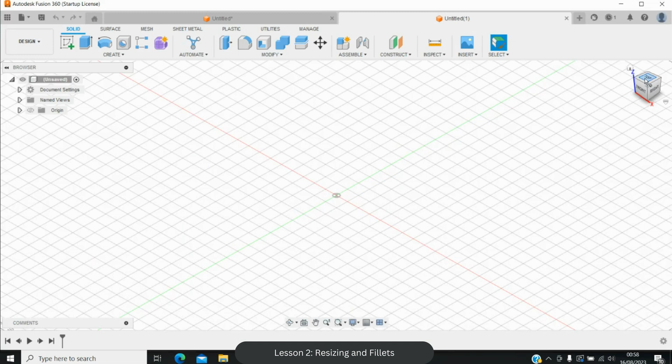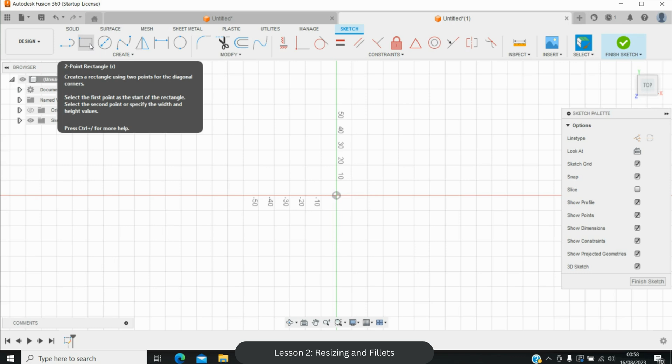So let's click top to get a bird's eye view. Let's create sketch and let's click this button. Now, because we're looking at resizing, I am going to make a shape that is bigger than what I want. I tend to work when I'm making my cutters at about a 10 centimetre largest dimension shape, just because that does make for easy maths further down the line. There are other ways to do it that we'll do in more advanced lessons. But for now, let's make a 10 by 10 centimetre square.

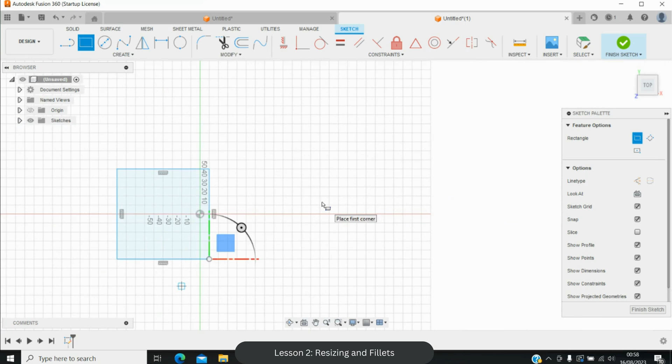So if you want to pop that in, so 10 centimetres at the top, 10 centimetres at the bottom. Perfect. So I'm going to pan that over because I want that to the side, and I'm going to zoom out. I'm going to hit the escape key. Okay, so we've got our basic shape. We are going to want to make 4 sizes of this today.

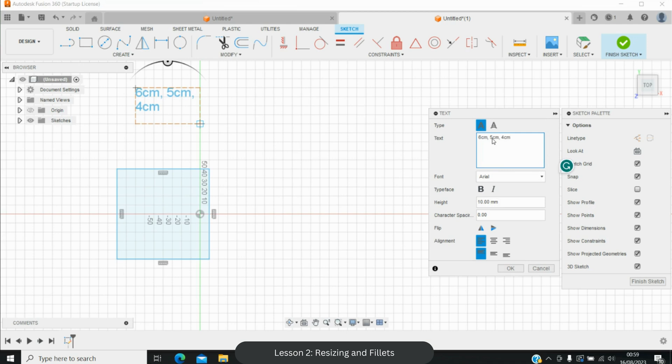So I'm going to click create and I'm going to put a text box. You don't need to do this, it's just for a little note what shapes we're agreeing. So we're saying we're going to make a 6 centimetre shape, a 5 centimetre shape, a 4 centimetre shape, and a 2 centimetre shape, just so I can remember easily what size I'm making.

Now, we can certainly go, especially with a shape this simple, and make 6 centimetre shapes, 5 centimetre shapes, 4 centimetre shapes, 2 centimetre shapes with little to no effort. However, this resizing that I'll be showing you is going to be very helpful on more intricate designs or ones that aren't pre-built shapes in Fusion 360.

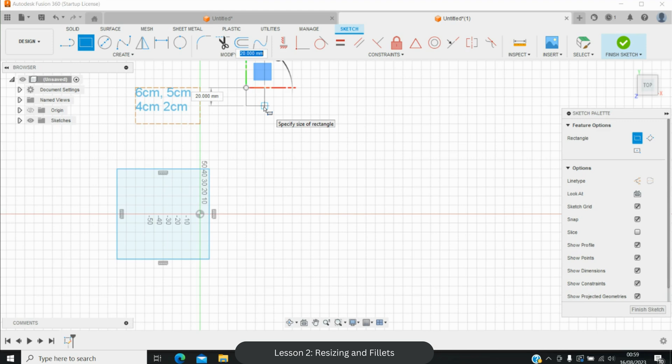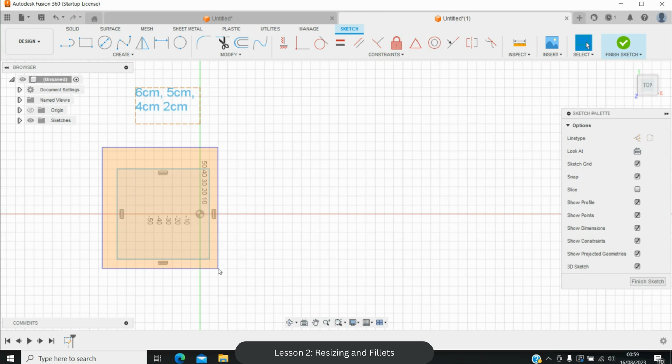So we're going to use a select option here. It is a window select that we will be using for this lesson today. There will be times in future lessons we'll be using the freeform, but you can see the window selection has a keyboard shortcut of 1. So select 1 on my keyboard, click and drag and highlight it all, let go of my mouse, and this shape is highlighted. Perfect. I'm going to right click on it.

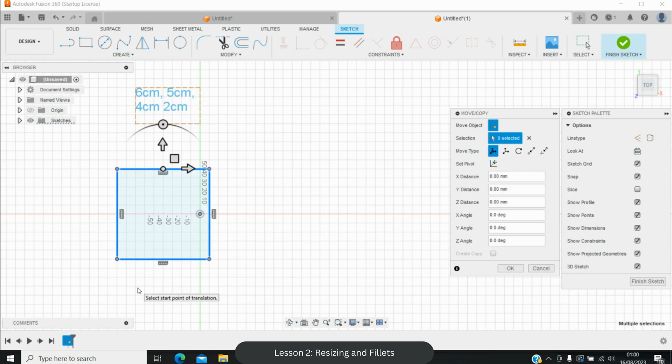Now I can either click copy or I can Control C on my keyboard. I'm going to click off that. Now you can either right click and paste it, or use the keyboard shortcut Control V, and that has copied the square directly on top of the original. So I'm going to move this over to the side, so it's got a nice 2 centimetre gap. Perfect. And I'm going to pan over to give myself a little bit more room.

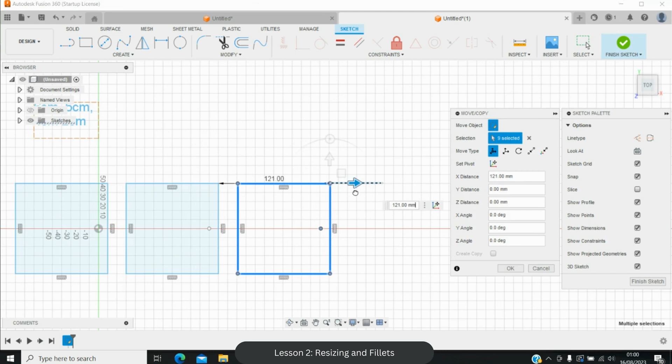I'm going to do the same. So I'm going to click, drag, so it's all covered. Control C to copy, Control V to paste. Pull that over. Now I have 2 shapes, and then I'm going to select them both because I'm going to be making 4. So I've covered them all. Control C, Control V. There we go. So I'm going to be turning this one into my 6 centimetre, this into my 5, this into my 4, this into my 2.

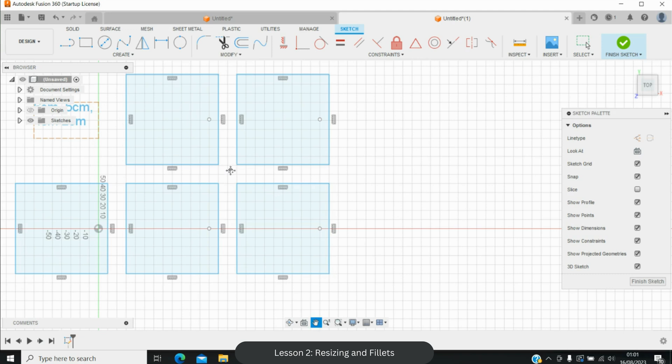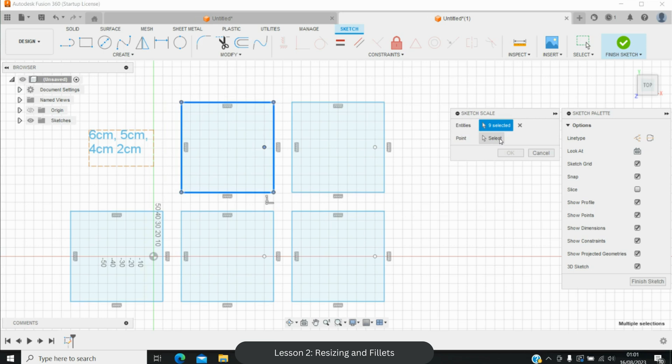Let's make it a little bit more centre. So we're going to again click, drag, highlight, let go. This is a shape. So we're going to use the modify section, the scale. That is a keyboard shortcut of W. Okay, so I'm going to hit the W button on my keypad. Let's get rid of this for a minute. Right, highlight, W. Now, it's asking what point should be the point that remains. So I'm going to select this bottom corner, and it's going to bring up a box.

If I wanted this to be a 20 centimetre cutter, I would just say make it 2 times the size. If I wanted it to be 5 centimetres, make it 0.5, half the size. So in this case, I want it to be 0.6, and it's a 10 centimetre shape. So I can either do 0.6, because 0.6 of 10 is 6, or I could say 6 out of 10, and they would make 6 centimetres. Again, with this one, W, select a point.

And again, because this is half the size, I could do a fraction of half, could do 0.5, I could say 5 out of 10 centimetres, and they will all make a 5 centimetre cutter. If for any reason I wanted it to select from a different point, I could just add in a little point and say, I want here to be my point of where you resize from.

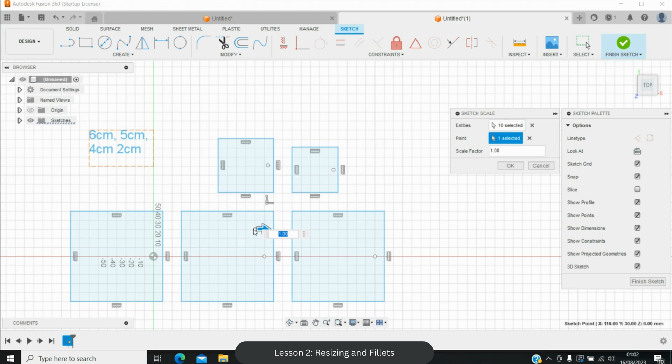So select all of this, W, and I want you to be my point of where you resize from. This is 4 centimeters, so 0.4. And select this one, W, I want you to move from this point, 0.2. These are my shapes. I'm going to move this one up a little, just so it's a bit more in line with everything else that's happening.

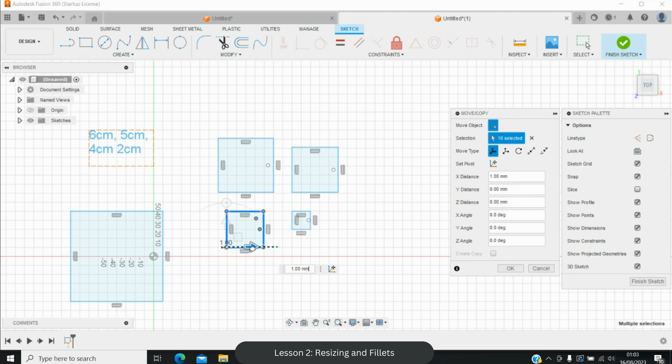Perfect. So we're going to start off with a 6 centimeter square here. So we're going to zoom in, and for the purpose of this tutorial, I will be flipping back and forth in the ways that we went over on lesson 1 on how to do cutters. I won't be doing each and every step, but we will start off by doing a 0.7 cutter for this square, 6 centimeter square one.

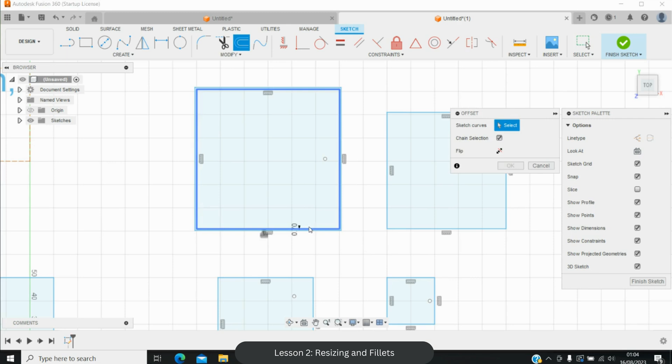So I'm going to hit O, and it's going to set the offset inside the shape, which I don't want. I want the wall on the outside of the shape. I can either use this flip button and it flips it there, or I can just pop in a minus, and there we go. Oh, I did that wrong. I said it's going to be a 0.7, so O for offset, minus 0.7, there we go. And then O for offset, minus 3.

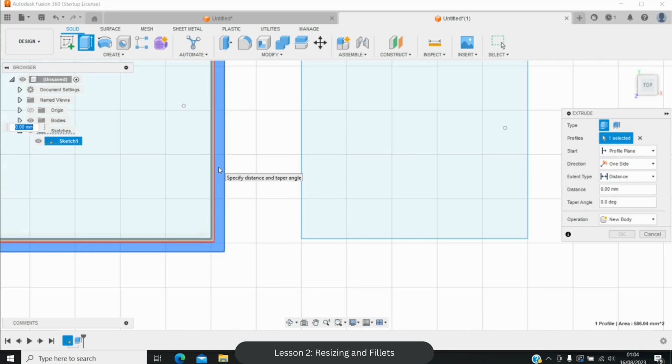That is a handle. Let's extrude this. So remember, let's click Finish Sketch. You can either use this or the extrude button. There we go. And remember, once you've done your first extrusion, the sketch does disappear, but don't worry. Click the sketch, click the eyeball, and there we go. That's come back up. We're going to do the handle. That is 3 centimeters. Perfect. So that is the first one done.

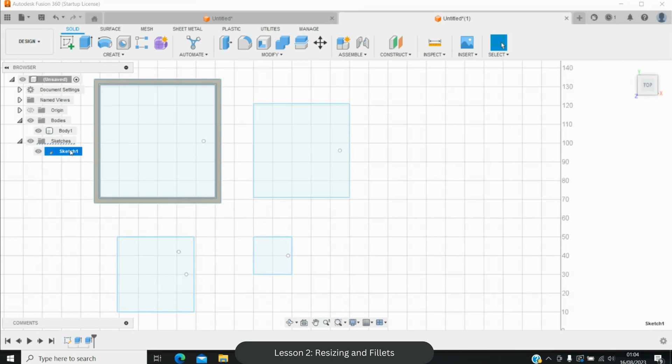Let's click Save. I've already got my folder set up of where I'm going to save it into lesson 2. So this is a 0.7 6 centimeter square. Right, so we're going to go back and add our sketch offsets for the next one. So right click on Sketch, Edit Sketch. So for this one, we'll be doing a 0.44 sharp edge cutter.

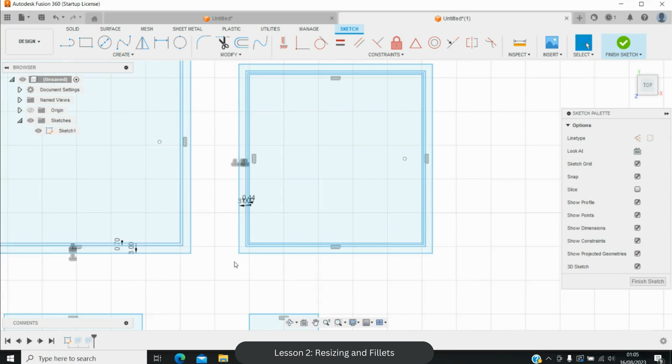So we're going to do O for offset, and then minus 0.44, O for offset, minus 1, because that's our support wall, O for offset, minus 3. There we go. Okay, so we're going to do our extrusion. So again, this extrude here, or E for extrude. This is 12 millimeters tall, E for extrude, 10, E for extrude, 3.

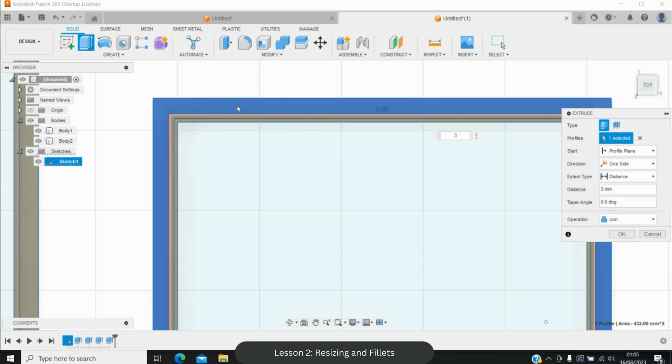Now on this one, I'm going to work a little bit different. When handling clay cutters, your hands are all over them. With anything with corners, normally of less than 90 degrees, if you are handling, it could possibly hurt your hand a little. So we're going to add some rounding to these corners, so a fillet option. So I'm going to use the orbit tool to look at these little corners here.

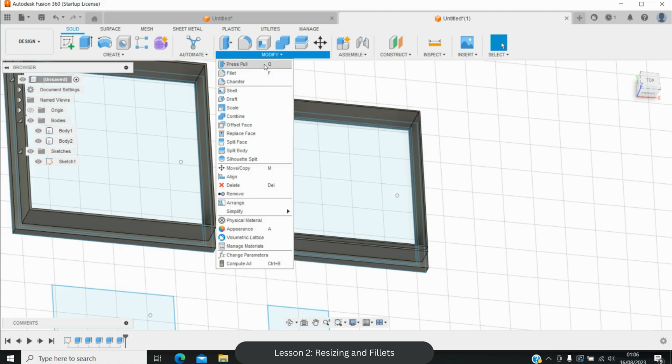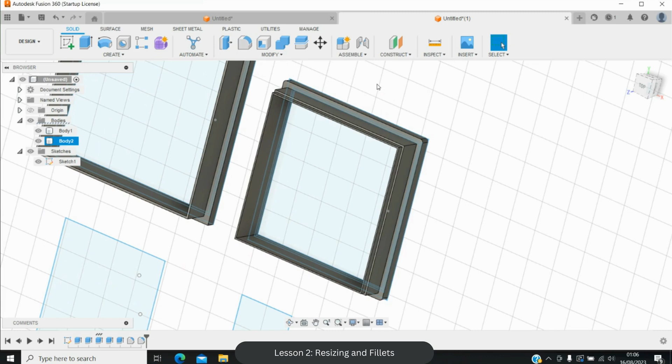So if you go to modify, if you go to fillet, it's a keyboard shortcut of F. So F. Now I can either go and select all of them, or I can do them one at a time. But once I enter a number value in, it won't then let me add any more until I've committed to that one. So that one has now changed to a rounded corner. And then I'm going to go to the F again. I'm selecting this little corner here, this little corner, this little corner, and making them all 1 millimeter. So this means it's got nice rounded corners here, and it's going to be easier to handle.

What some people like to do as well is add fillets to these edges here. Now, your hands don't overly touch these too much, so it is personal preference. It does sometimes look aesthetically pleasing as well. But again, if you were to use the F, if you were to select that, you could add a rounding to there. You could also add a rounding here. So let me show you.

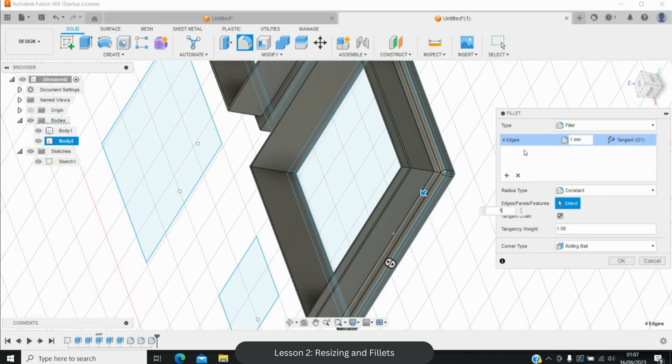We have to do each edge of this simply because it's not got a curved corner, so it's recognising each one as separate. There we go. Let's go to top. Perfect. I'm not committing to it yet because I want to go into it, and that's not nice and tidy. Let me rotate. There we go. So if I did it to that corner, it would give it this nice slope in.

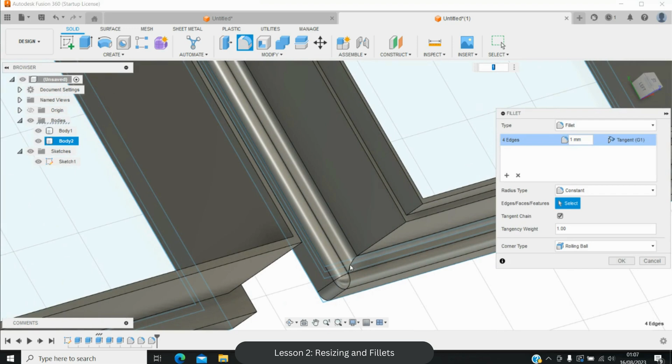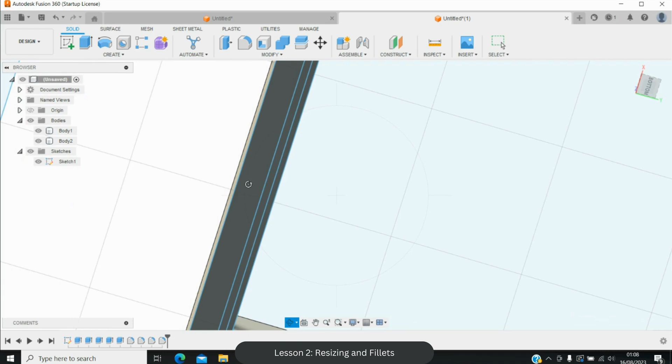So this one has some nice curved finishes. Now, one thing I would be aware and be careful of is adding it to this corner. So this is where your hands are mostly going to be when using cookie cutters, because you'll be pressing down on this side. If you fillet this too much, there may be adhesion issues to the printer bed. So if you are going to fillet it, I would give it a very small fillet, so like a 0.3.

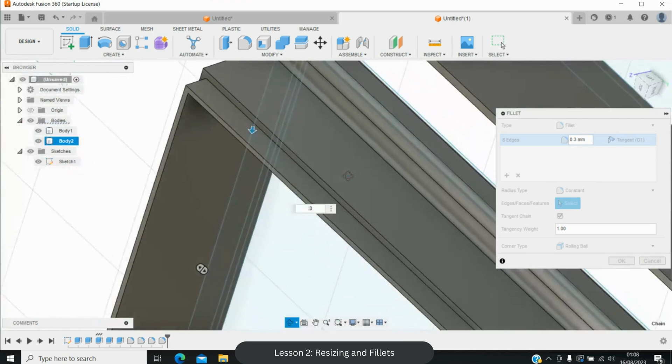So it's got a nice rounding, but you're not losing too much surface area, and it's not too sharp. Again, personal preference, it's not something I do on mine. I'll only tend to fillet my sharp corners. I don't tend to do this edge filleting or that edge filleting. If that's something that you wish to do, go for it.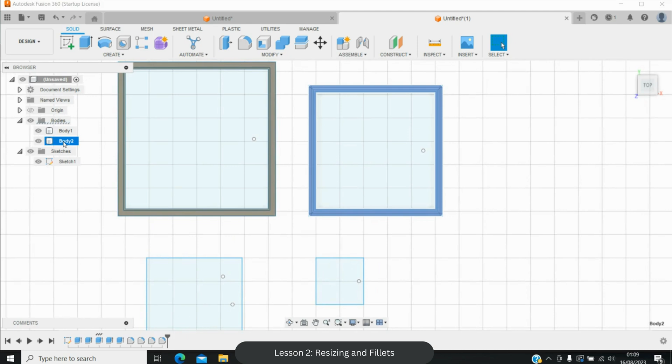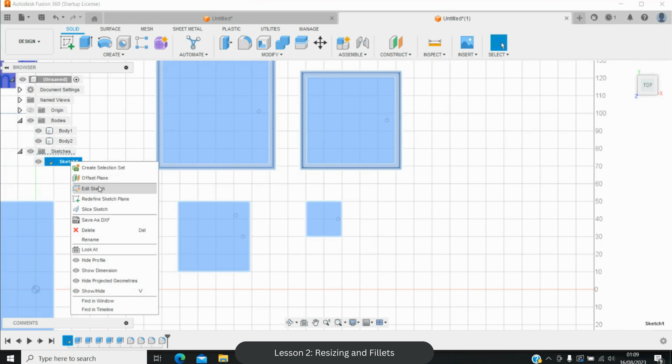But let's get back to orientated nicely. We have now done this one, so save as sharp edge, 5 centimeter square. Okay, so I'm going to show you another way now. So we're going to go back to sketch, edit sketch. So O for offset, and this one we're going to do as a chamfer edge. So a -1, and then a -3. What we're going to do here, we're going to add sketch fillets.

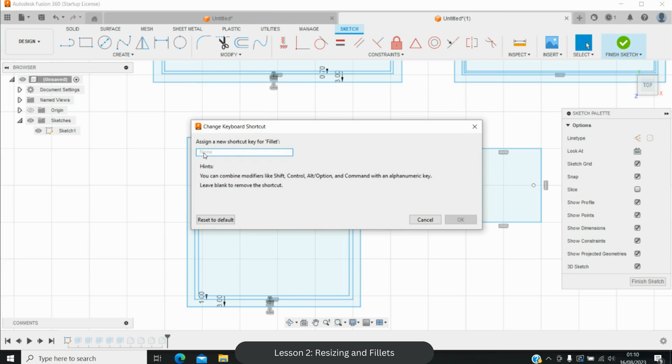Okay, so go to modify in your sketch, and you've got a fillet here. Now I have set myself a custom keyboard shortcut. It doesn't come with one. To add a custom keyboard shortcut, click this, click change keyboard shortcut and pick whatever you would like to remember. Because filleting on a physical object is F, I've gone with Shift F, because they both fillet, but one works in physical modes, one works in sketch. So I have set that, so it's now Shift F.

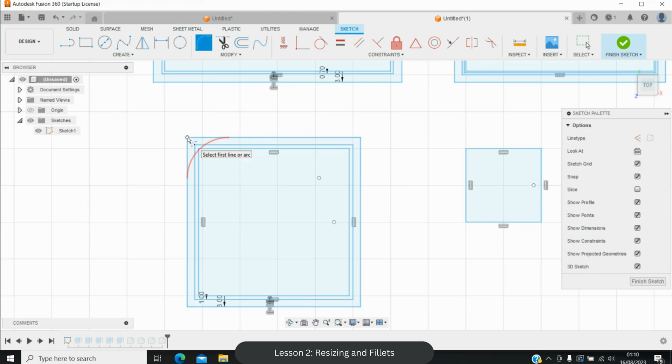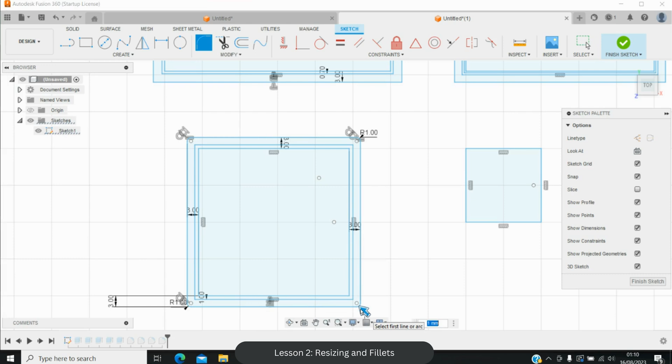So if I do Shift F, and I want to fillet this corner, I only want to give it a little edge, and by all means I can select multiples. So I'm going to make it 1 millimeter. I can select multiples if I want, and I could do them all. In certain cases, it may not recognize it's a corner, so you may need to select the 2 walls instead of the corner, but if it allows a corner, that makes it easier. Right, and there we go, we have that one done. So we're going to extrude this 12, extrude this 3.

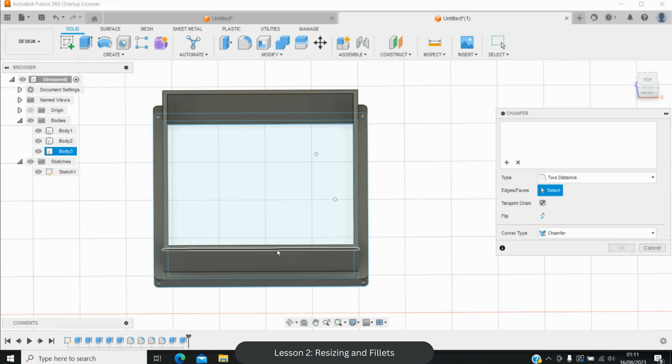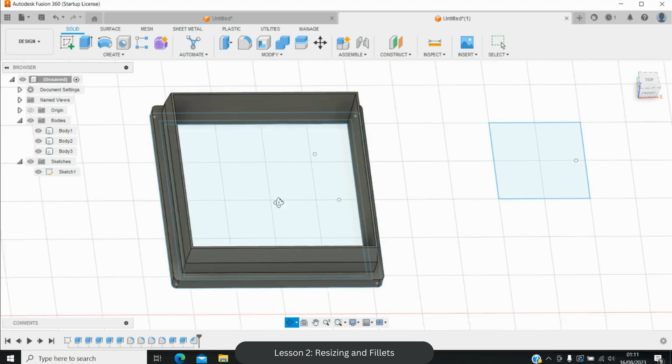Last time I couldn't spell chamfer when I was typing it. Now I can't spell square. Oh gosh. Right, that is saved.

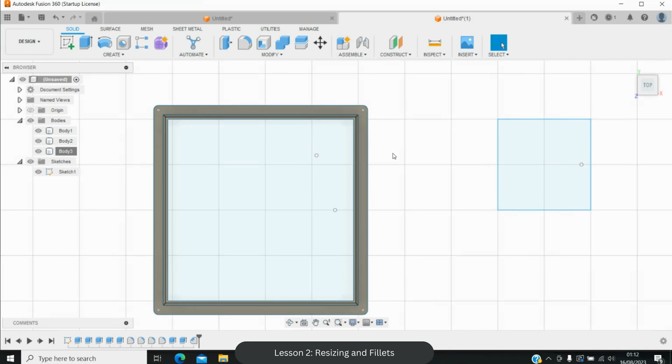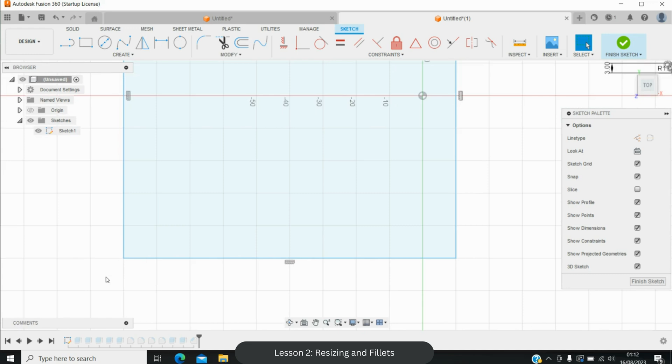Now, what I tend to do when I'm making mine, I will actually add the fillets to my reference shape. Let me show you now. So I'm going to go to Edit Sketch, and I'm going to delete this for a minute. And I'm going to make tiny little fillets to these corners, and you will see why in a minute. So Shift F, and I'm going to make it 0.1. Makes that 0.1, that 0.1, that 0.1. Okay, let me just save that. And oh, I didn't want to finish the sketch.

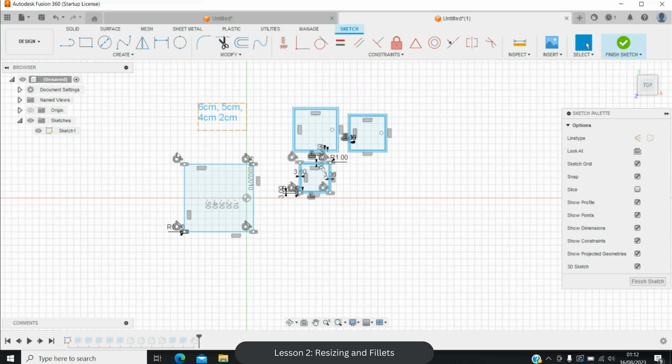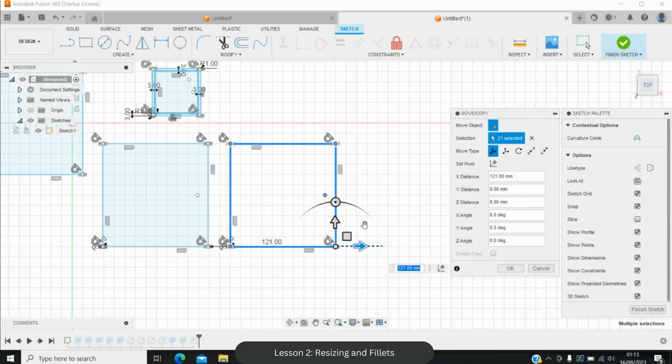So the reason for this is because I tend to use one reference sketch and then resize it, because when I'm making my designs, I'll tend to offer them in multiple sizes. It puts a rounded corner on any sharp corners from the get-go. So we're just going to copy and resize this twice. And I'm going to make this one 4 centimeters like this one above.

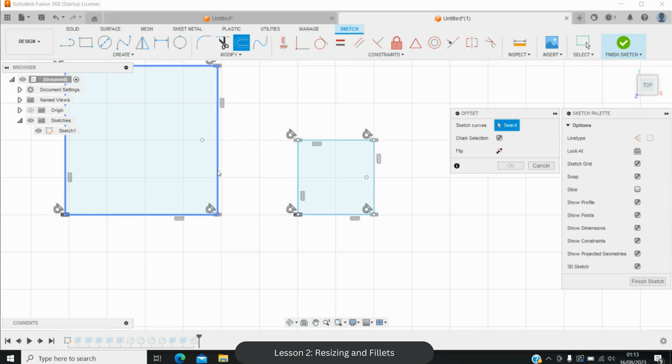So 0.4, and then this one 2 centimeters. Okay, so if I zoom into this corner, this is not going to be visible to the naked eye. So when you're making a cutter, you're cutting into your polymer clay or cookie, because this is such a small curve, to the naked eye it is still going to look like a sharp corner. However, when I set an offset, so -1, you will see that this offset has curved too, and then -3, and this one has a nice curve as well.

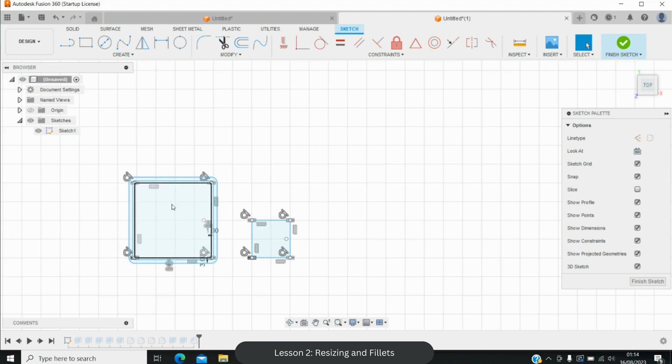So what that means is if I'm making, for example, a square, it's a very basic shape. You might want little studs from it. You might want to make coasters, which are 10, 12 centimeters. So you could be making a dozen different sizes. Instead of having to fillet the corner of a dozen different sizes, if I do it on my initial sketch, it's going to be one step less on every other one. So again, offset, -1, offset, -3. And again, see, nice curved corner.

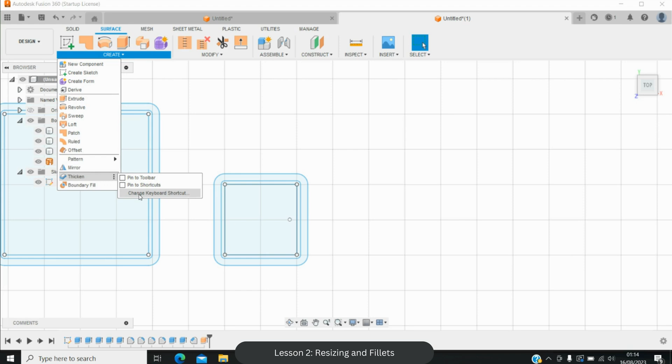So on this, we're going to make the cutter how I would make my sharp edge cutters. So I go to Surface, Extrude here, 12. Now, this one, I do apologise, I've had it so long, I forgot my thicken in lesson 1 was a keyboard shortcut I had put in. So just to recap then, I have Shift T as my keyboard shortcut. I did wipe it just before this lesson, but add your keyboard shortcut in. So Shift T, click OK. So now Shift and T will always work.

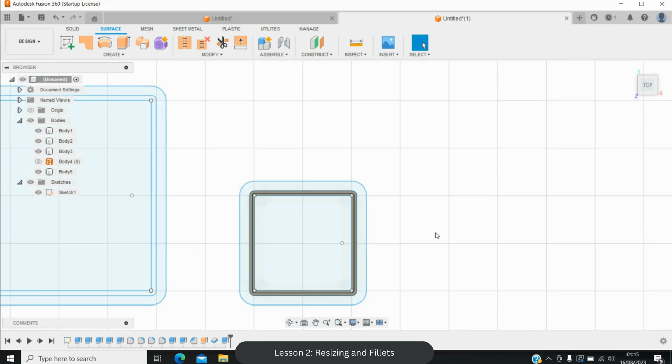So 0.44, extrude, 10, join. I'm going to make a deliberate mistake on the next extrusion. I'll show you why, because this is an error that may sometimes come up. So click E, 3. Instead of join, which will automatically happen, I'm going to set it as a new body. What that will basically mean is it recognises these two walls are one shape, and then this is another, and it's saying that they're not one physical body together. So if I was to save this, it would not have the handle attached.

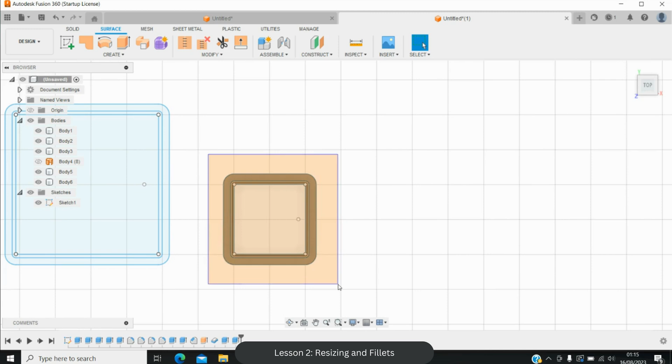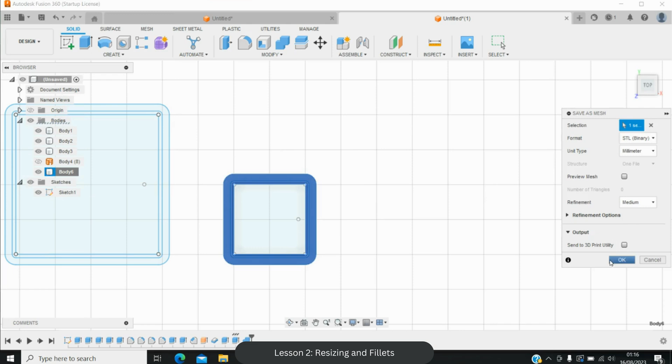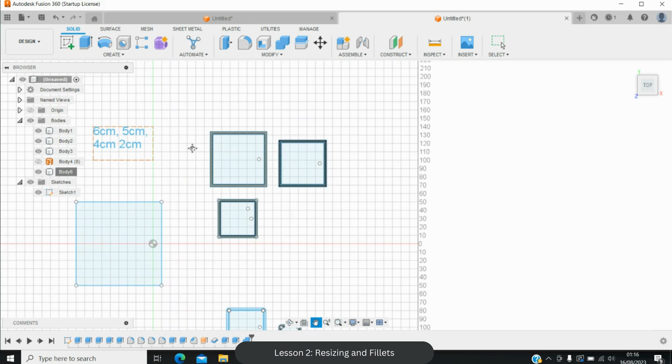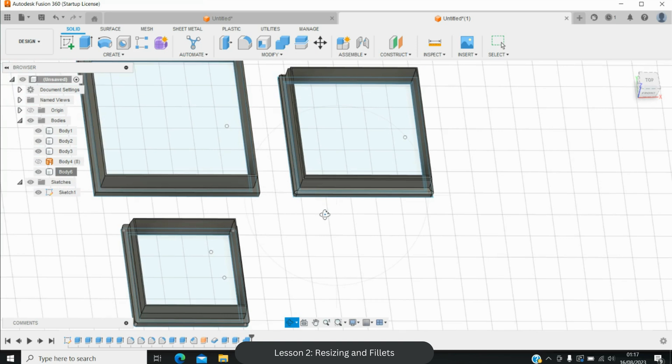So just a quick recap. We have covered resizing, how to scale. We will be doing more complex rescales down the line, especially with shapes that aren't 10 centimeters on your design, how to calculate them. We've gone through how to fillet, so fillet on a physical body, the corners where your handle is, whether you want to do it to the edge, and be careful on the printing bed side. And if you want any aesthetic fillets as well, that can possibly add a bit of strength to it as well. So there is an argument for that. And then how to fillet on a sketch before you start building the bodies. And then the pros of adding your fillets to your reference sketch. So all resizes and all copies have that built in. So it's one less step to do later on.